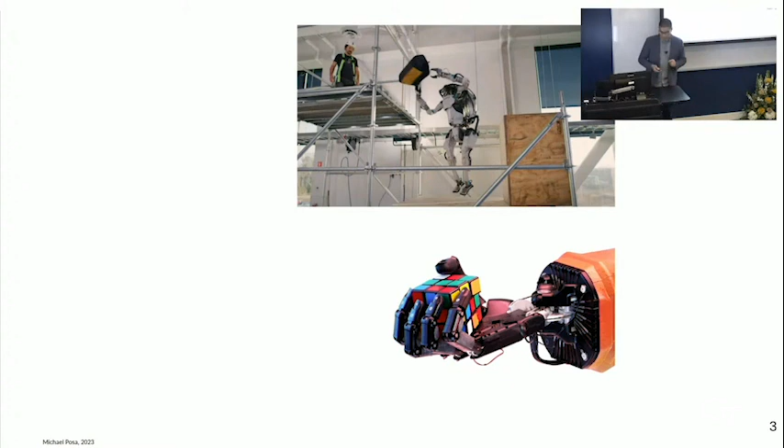But at the same time, these videos aren't even all that new anymore, certainly not the OpenAI hand. And I don't have an Atlas in my house yet, or my workplace. Okay, so maybe I do, because I'm a roboticist. In my workplace, I do. But I don't in my house, and I don't have a dexterous hand either, or a Shadow hand or something like that. What do I have in my house? I have a vacuum cleaner.

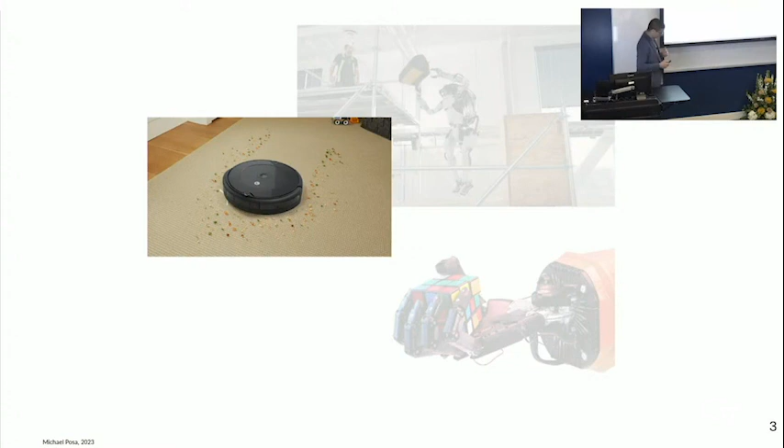And what happened to the promise of the field? We've been promising these extremely capable, high-performance machines for quite a long time now. And it feels like we're still pretty far away, right? So what's missing? And what are we going to do about it? And to be a little more specific, I think one thing that's missing is the ability to deal with generality, to deal with the unknown.

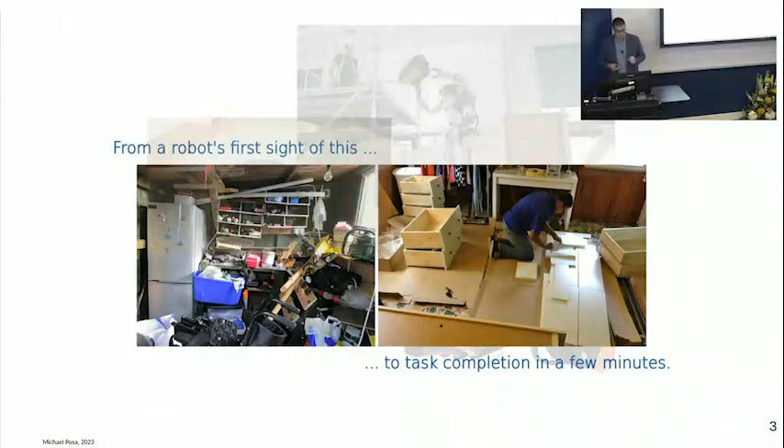I would like to work towards a robot that can enter an environment, hopefully not one quite as chaotic as this person's garage, but an environment that is filled with things it's never quite seen before, where it's going to have to accomplish a task that's different from anything it's done before. It can leverage past experiences, sure, but there's something new about this setting, and I'd like to go from this into some kind of task completion within a few minutes. I think it's a reasonable goal. I think humans can do that. I think we're fair in asking our robots to handle the unknown with some degree of skill.

And you can also imagine, well, if I want to go into a setting like this and accomplish a task, there's a lot of things that I'm going to need to deal with. I'm going to need to be able to find where the tools are and then manipulate them. And those tools may be a little bit different from what I've seen before. And I'm going to need to be able to pick up and work with the pieces of wood and align them in certain ways. Maybe there's some peg insertion bits that go along here. There's some forceful interaction with the tools.

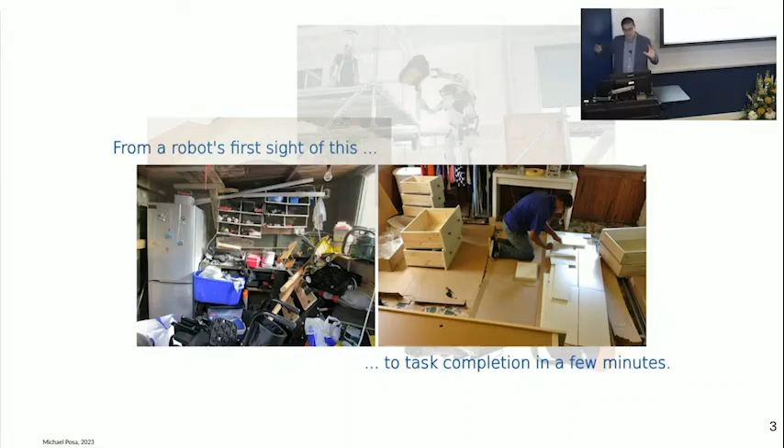I also am going to need to make sure I protect my environment so I don't damage it. You can see this person's laid out cardboard. So there's a lot of bits and pieces for us as roboticists to work on. Obviously, I'm not going to talk about all of them today, but I do think this idea of dealing with novelty and dealing with low data is going to be relevant.

Okay. Now, again, very much informed by what we saw at CoRL. And I'm sure many of you here were at CoRL recently. Why do I care about low data?

I think there's a perspective that says data is all we need, and we should be putting our efforts towards scaling data. And we've seen this, for example, from the recent OpenX announcement, where Google and many collaborators collected basically as much data as they could. So something like 20 different institutions, 22 robots, 500 skills, 150,000 tasks and 1 million different episodes. So lots of data has been collected, and they're trying to see what they can do with this.

I think this is interesting. I think this is an exciting direction for the field to take. At the same time, this type of performance has really only scaled to pretty simple tasks at this point. Right? We'll see where it goes in the future. Again, I don't want to discount it, but I think we're a far cry from saying that data has solved all of robotics.

We can also look to other fields. Look at press clippings from other areas, and ChatGPT. Again, very, very exciting. We'd be foolish to ignore this. But ChatGPT is not quite reliable enough where you would trust it with your life, right? And I think that's something we're ultimately going to ask of our robots, that they be extremely trustworthy. So, what are we going to need more than data? And obviously, a lot of work now is going into trying to fix this on the LLM side.

If you think data is all you need, you could also look at the autonomous driving sector, right? Where Tesla has had the ability to collect vast amounts of data for years now from all of their cars, and yet autopilot is not particularly safe at this point in time. So what's missing? Is it just more data, or is there something more fundamental? We can look at Cruise as well, where the autonomous vehicles, after decades of research, still require significant amounts of human intervention.

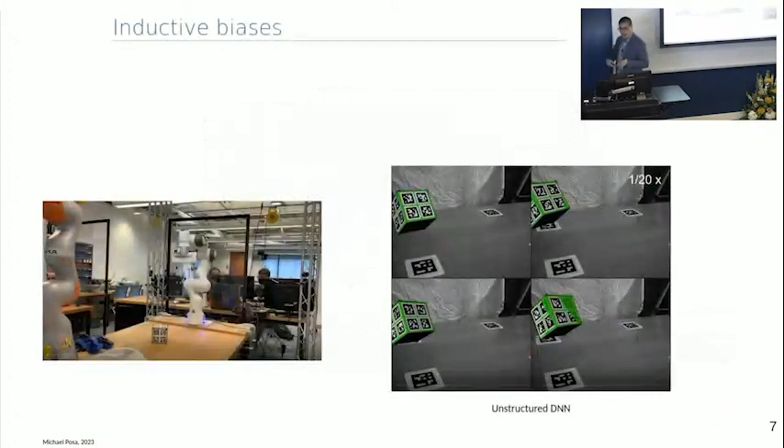In fact, that data comes from a cube. We took a cube, and we asked our robot to throw it a bunch, and we collected data. We collected hundreds of tosses. And then we could ask a neural network, either an MLP or an RNN, to fit that data in a single-step fashion and then roll out predictions.

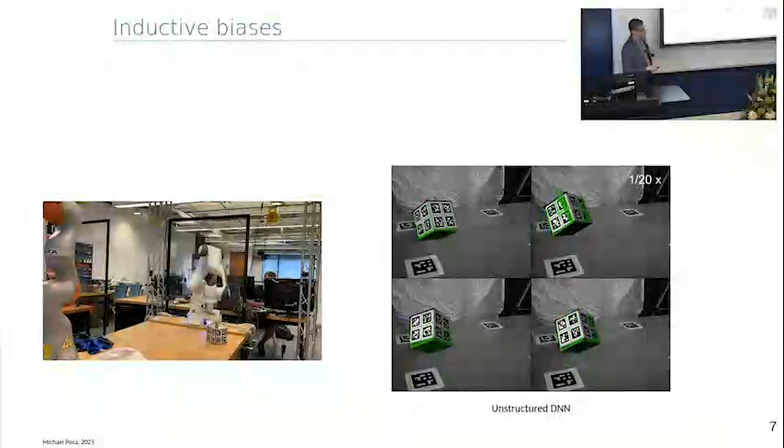And what you see from our best attempts, this is hundreds of tosses, which I think should be enough, is that it gets the bulk motion more or less correct, but it really struggles with orientation. It really struggles with things like penetration. And this is because it has no understanding of this impact effect.

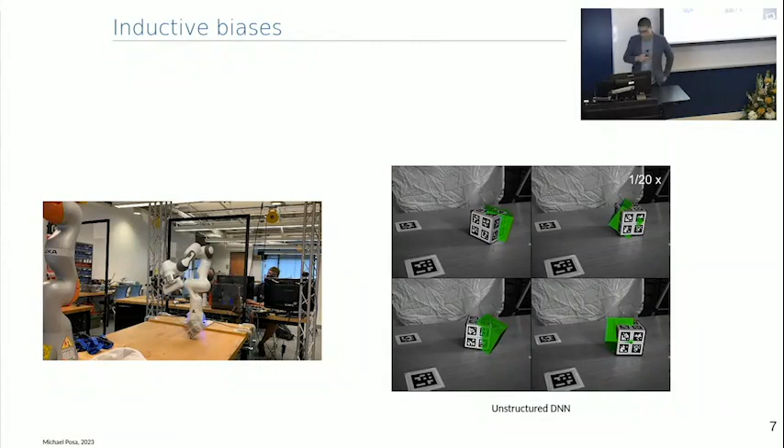Fundamentally, what's going on here is that when we train a neural network and we introduce something like weight regularization, we are now biasing towards smoothness or biasing towards low Lipschitz functions. And the phenomenon we're trying to capture here, this robot interacting with the world, object interacting with object, is not smooth, it's not simple, it's not low Lipschitz. And so we have this basic misalignment.

Implicit learning is one step in this direction. By implicit learning, I'll take a simple perspective here, one variation, which is: instead of learning some function y equals f of x, I'm going to learn some function h where y is now the argmin of h of x comma y. This is one variant on implicit learning. There's lots of others. And what we've seen is this is really useful for representing non-smooth functions.

We've seen this, for example, in things like energy-based learning. We've seen this in diffusion policies and in diffusion models and in implicit behavior cloning. This implicit function can represent things like discontinuity quite nicely. And so I think it's one important piece of the puzzle.

Differentiable simulation is another variant in this idea. So I want to make sure that when I talk about implicit learning, I'm sort of putting all these things into the same bucket. So differentiable simulation says something like, learn some parameters for my dynamics, geometry, friction, inertia, maybe even a deep network for residuals, and then take those parameters and pass them into some kind of physics engine, some kind of convex solver. This can be whatever your favorite simulator is. It can be MuJoCo. I don't care.

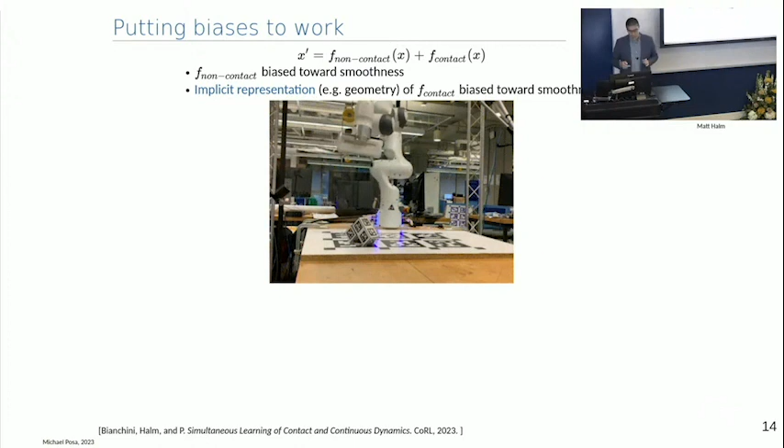And the really cool thing here is that because we bias everything we learn towards smoothness, that's automatic, right, by weight regularization, we actually can disambiguate the two. So the non-contact force is biased towards smoothness, and the implicit representation of the contact bit is also biased towards smoothness.

And so you can actually learn here without any human supervision, without any annotation of when contact occurs, without any explicit detection of contact. You can learn which motion, because it was stiff, because it was high-frequency, must have been generated from contact, and which bits of the motion were probably generated from some non-contact effect.

Any questions on any of the learning bits? I'm going to transition a little bit. Yeah. Do you anticipate this generalizing with some shenanigans towards like soft or deformable objects as well? I do. Yeah, I do. I mean, soft and deformable is both easier and harder.

So I think it's easier in the sense that you no longer have impacts. You do still have non-differentiability because the object doesn't move until you touch it. So you have this non-smooth transition when you make and break contact, but the actual physics are not quite as stiff. So it's easier in that sense, but obviously harder in the sense that you have this very deformable object. What is state? Those fundamental questions.

I think we've thought about things like using keypoint-based methods to deal with softness, or maybe using kind of a deformation-based approach where you learn deformation. If you've seen like the work from Nima Fazeli on the topic, things like that, I think could apply here. Okay.

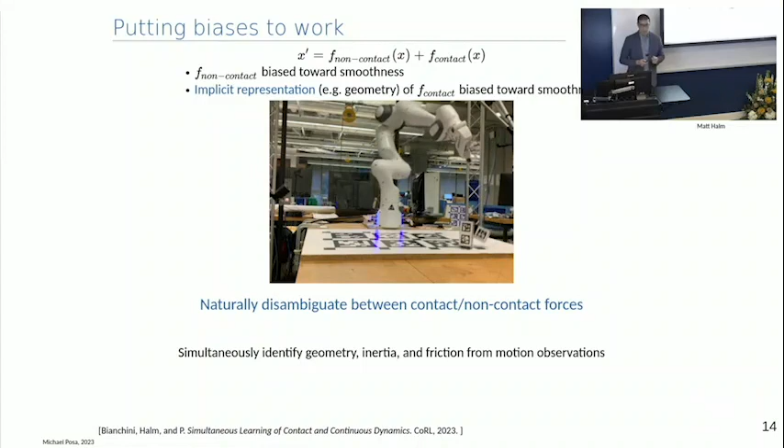All right, so we can learn these models, and we can learn them quickly. And we can learn them in a data-efficient manner. So I'll talk a little bit about control. What do we do with the learned model? And the story for this is I would like a controller that is going to, in real time, autonomously, by itself, decide what to touch, where to touch it, and when to touch it. It's going to make these hybrid control decisions in real time.

And so how is it going to do that? It's going to have to evaluate all possible combinations, and it's going to get stuck. This is a problem I've been working on for a number of years, really since basically year 2 of my PhD, and I'm super excited that Alp Aydinoglu led efforts here and got us moving.

If I think about control, right, the first thing I would teach or try is something based on linearization. And linearization fundamentally can only really approximate a single contact mode. Right? If I linearize motion in the air, it tells me really nothing about what happens when I touch the table.

And therefore, things like iLQR can really struggle to explore contact modes. Even if I use differentiable simulation, I can write that down, I can code it up, it'll work, it'll do gradient descent correctly, but it may not uncover the fact that I need to reach out and touch the wall to prevent falling, or I need to touch the object to make sure it moves.

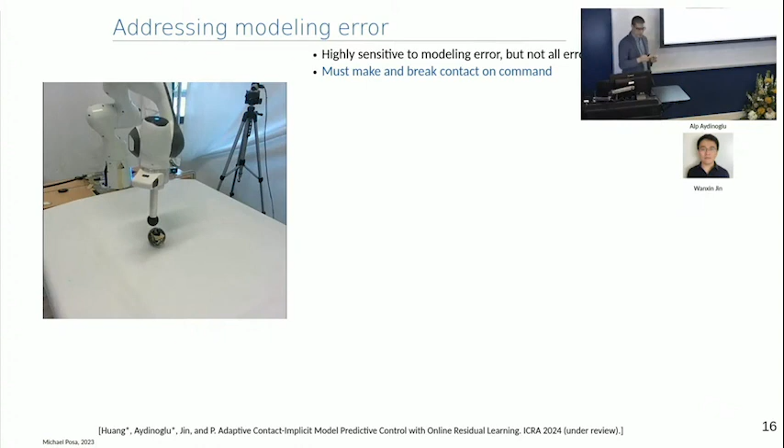And so there's this sensitivity, and there's this particular sensitivity to the hybrid aspect of the problem. So this is work, I would say, first of all, led by Wei-Cheng Huang, who's a master's student in my lab and is looking for a PhD program, so keep an eye out. He'll definitely be applying here. Submitted this to ICRA. And so the idea here is to take the model learning parts we've done and combine them in an adaptive fashion.

And unlike most adaptive controllers, we're explicitly going to try to adapt the hybrid aspect. So we're going to try to online learn more or less the hybrid guard when we make and break contact. And we're going to do that in this residual learning framework. And so you can run this residual learner. And the really cool thing here is that because we have this implicit loss function that generates meaningful gradients essentially everywhere, we get a nice gradient simply from trying to touch the object.

If you try to touch the object and fail, you actually get a useful gradient that says, okay, you weren't quite close enough, you should get closer. And so there's this initial phase where we're even failing to touch it, we're still learning something, and then it pretty quickly adapts and becomes more and more successful over time. So it works for a sphere with a poor initial model. It works pretty reliably in this case.

And then, because I'm a cruel advisor, I said, try some other things, try some fruit. And those are kind of like balls, and they should kind of work. And so it turns out they do. You can get an orange to roll, or you can get a lime to roll. It's a little bit trickier because these things aren't quite round. And so if you make a mistake, or even if you don't make a mistake, sometimes they just roll away from you, like they topple and kind of tumble away.

But the same process actually works surprisingly well for almost round objects. And this is a very, very simple paradigm. We're just doing an online adaptation of that hybrid guard and otherwise considering the object to be a sphere. Okay, so

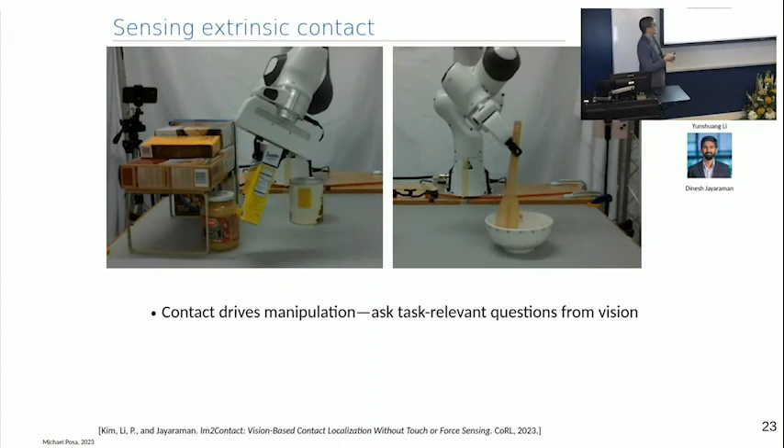And so we want to say, can we use vision to extract these relevant bits of information from the scene? We can all tell what's happening from the image. Can we ask a computer to do it? And I think it's useful to narrow down the question here, by specifically asking the learner to detect contact, as opposed to something like reconstruct all the geometry and then use that reconstruction to infer contact. By narrowing the question down, we can get more reliable answers.

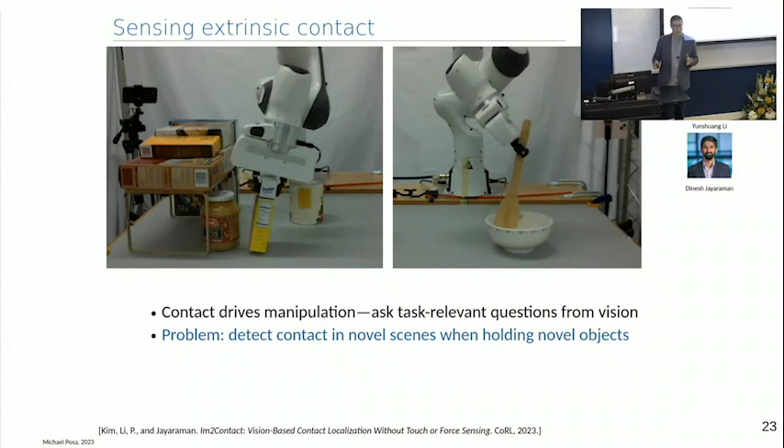So the problem we want to ask here is, can we detect contact in novel scenes when holding novel objects? So this is extrinsic contact between the held object and the scene. Force sensing here might be useful to some extent, but because the force sensors aren't co-located at the contact event, they're only partially useful. So for now, we're going to ignore them, and maybe in future, we'll try to bring them back in.

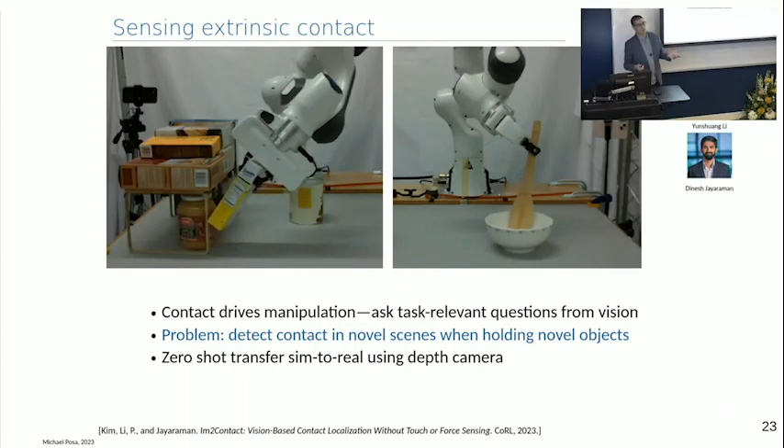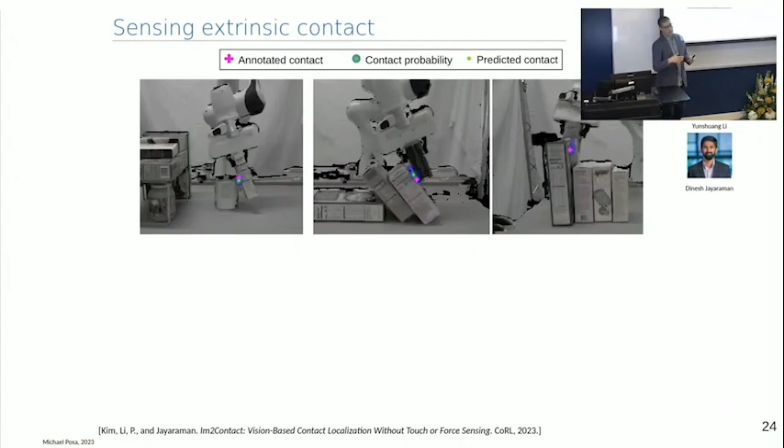It jumps the gun a little bit, but it gets the bulk idea of that transition to edge contact correctly. It also deals pretty well with things like sliding, stick-slip transitions, you can see over here, or even things like occluded contact on the back here, where the held object is only partially visible. The ability to handle occlusions is helped a little bit by the fact that we provide the network with a single image of the robot holding the object. And this gives it some ability to disambiguate what the held object is from the scene. So we provide that a little bit of bias, and it can extract that.

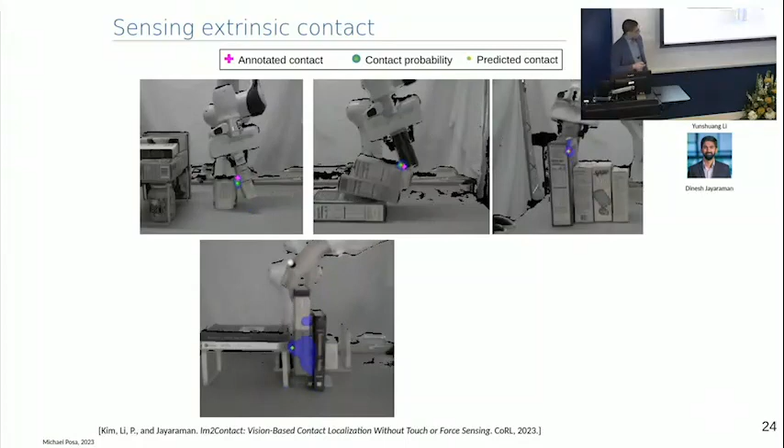And then thanks to the reviewers actually on this paper, this is also at CoRL down the road. This actually generalizes surprisingly well to out of distribution settings. So this is a human now inserting a book into a bookshelf, and you see it's doing a passable job, I would say, at predicting contact, even though this thing has been trained entirely on robot data. And then also for soft objects. So we've trained on rigid objects, and it works reasonably well for soft objects.

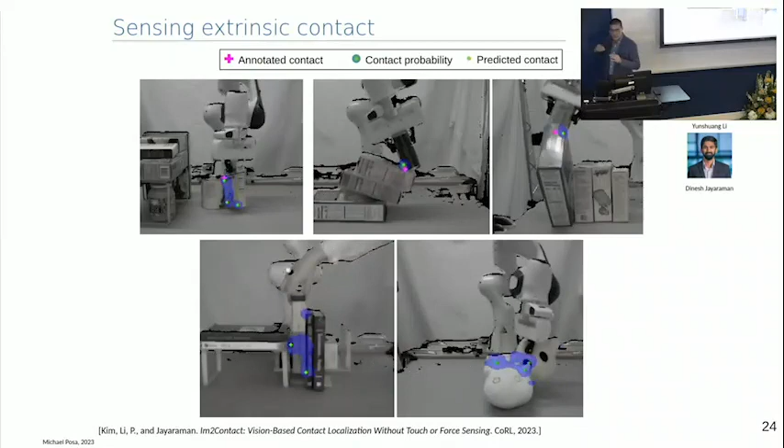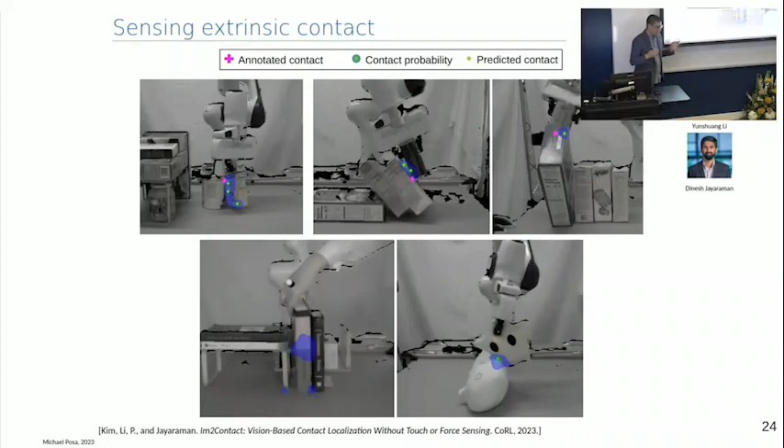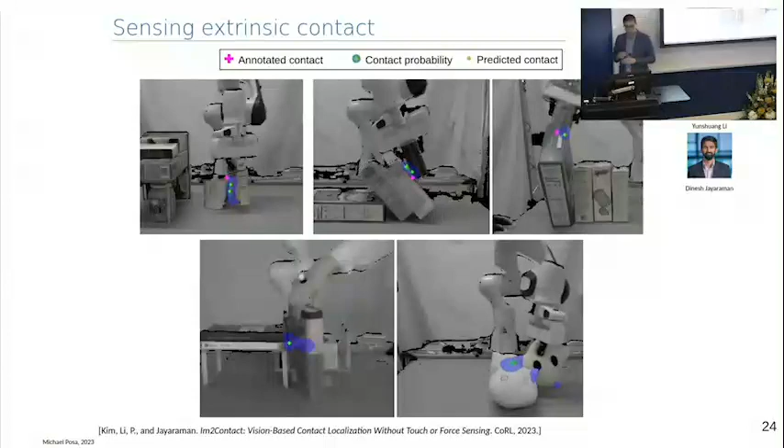I think this is an interesting set of questions, but by no means complete. Leon in particular, and this is a collaboration with Dinesh Jayaraman, we're thinking now about, if we can extract this information from the scene, and it needs to be improved a little bit, but I think it's on the right path. If we can extract this information from a scene, how can we use it, right? In many ways, because these tasks are so naturally driven by this interaction, maybe these bits of information provide nice supervision for something like human to robot transfer or any kind of imitation learning. So these are questions we're asking. Also, I should say, Yunshuang, also a master's student looking for PhD programs this year.

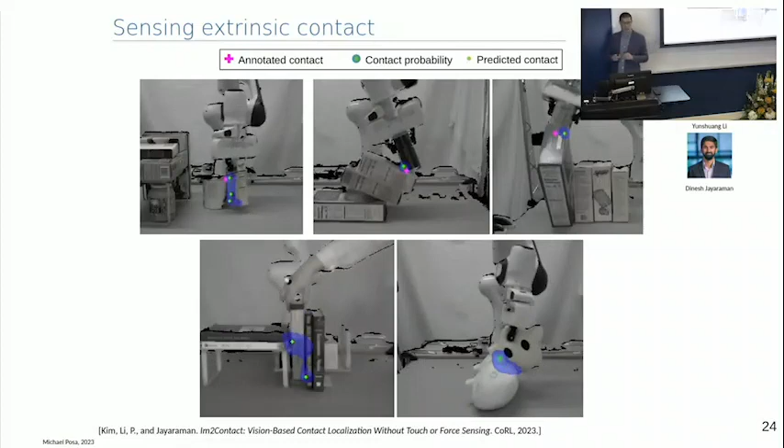Okay, and with that, I'll just conclude there. Going back to my soapbox, I suppose, I think there's a really critical role for us as academics to play in robotics, and I think this role is even more pronounced if there's more than data that's going to be necessary to enable robots of the future. I think it's possibly true that if data is all we need, we can just all quit now and let people go out and collect data, okay, and stop doing research. But I think if it's not the case, then there's a really critical role we need to play.

And I also really encourage people, particularly the younger students in the audience, to find problems where you can have impact, to find problems where your insight is going to push that boundary of knowledge forward, right? As opposed to getting into a race with someone down the street or across the country to produce this result first. I would say if you're looking at a problem right now, and you can say with some degree of certainty that whether or not you work on it, someone is going to solve it in the next year, maybe pick a different problem, right? You're not necessary for that task, right? So find something where you're going to have a unique thing to say.

Okay. Unfortunately, I didn't talk about our locomotion work. We do some running and some jumping. It's fun with our Cassie in the lab. I didn't talk about it today, but it's always exciting to have a Cassie. I know you guys have Cassies and Digits here as well.

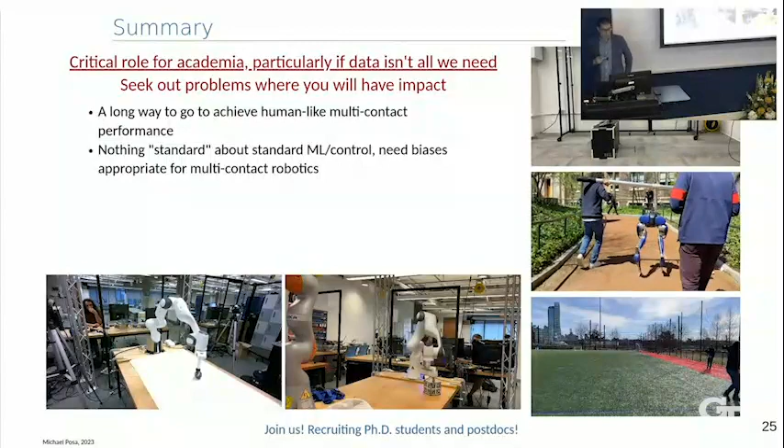I want to leave with this message that first off, we're still a long way away. Okay, I mean, don't be convinced by flashy demos right now that robotics is about to be solved. I think there's still a very long way to go to these things deploying in the home or in the workplace. And I also think there's really nothing standard about robotics. Okay, and if you take a tool off the shelf, that tool has some bias in it. Whether it's hybrid system theory or machine learning, it has some bias in it. And we need to make sure that the bias of the tool we're using is aligned with the bias of our problem. And if it's not, we need to make some adjustments along the way.

There's some threads I didn't talk about today. I'd be happy to chat about them offline. We're definitely interested in vision, as I mentioned. So we're looking hard at basically how can we take sets of problems like this and actually do everything from vision. And I think there's really nice connections between vision and contact, because both of them are very much driven by geometry. And so I think it's a way to frame it as a joint problem that we're working on. I didn't talk about tactile sensing. I think that's obviously a critically important bit here.

We've done a little bit with tactile sensing for feedback, but I think there's a lot more to do in that domain. We're looking at imitation learning, behavior cloning. I think drawing these connections to implicit learning by introducing this implicit loss, there's a potential for impact there, where the learned policy or the cloned policy has similar features as the model.

And then also we're trying to escape this local linearity. I think that's a big limitation of some of the control work so far, the idea of geometry being locally linear, and so how can we get around that? We have some interesting ideas that are not quite ready to publish.

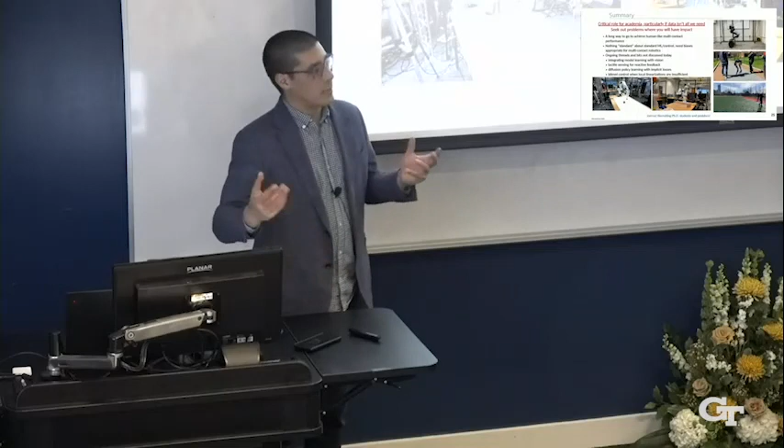People have looked at essentially sampling into contact modes. And I think that's not a particularly useful way to reason about this because there's so many modes and so many mode sequences. So our first approach here is to reason more about sampling into the state space or position space. So from the perspective of manipulation, if I want to push an object toward myself, I can think about, well, what happens if I move my arm to the other side? And then run local control. So leverage local control to make these nearby mode decisions, but have some global, higher level, bi-level supervision that's allowing you to reason about possible bulk motions.

All right, I have a question. So I think the key idea here, and you said this, is choosing the right biases for training your models, right? And in this particular talk, the biases come from some physics interpretation of how contact is made, and before the learning revolution, we started modeling contact with these complementarity constraints. I'm curious how this can apply. Maybe this is not something you've thought of, but are you pushing towards choosing the right biases in other areas besides just contact? And maybe this is just a chance to talk more about locomotion. I don't know.

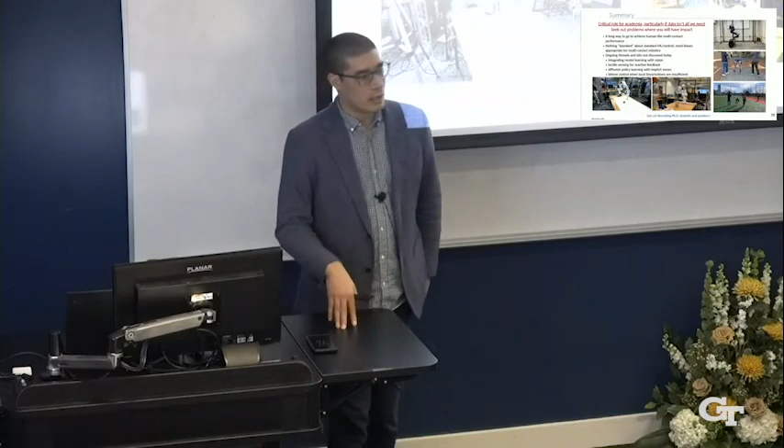I would say, without the locomotion side for a second, I think the same principles really should apply if whatever you're trying to learn is stiff or is multimodal. I think the same challenges occur in reinforcement learning and in imitation learning, even if that structure is not explicitly contact, but it is some degree of stiffness or multimodality. We're trying to show that. We haven't quite done it. We just started a couple weeks ago, for things like diffusion policies. So we'll see where that gets to.

Locomotion is also multimodal in the same way that manipulation is, but I think it exposes a different set of challenges. The dynamics tend to be faster, the impacts tend to be larger, the number of modes tends to be fewer. So certainly some of the questions you have to ask, for the jumping, is how do we handle impacts, right? How do we handle that mode event? That's a really important question for something like jumping. Some of the same principles apply, but I haven't quite thought about how the learning bit would fit in there. So it's a sort of partial answer, I guess, to your question.